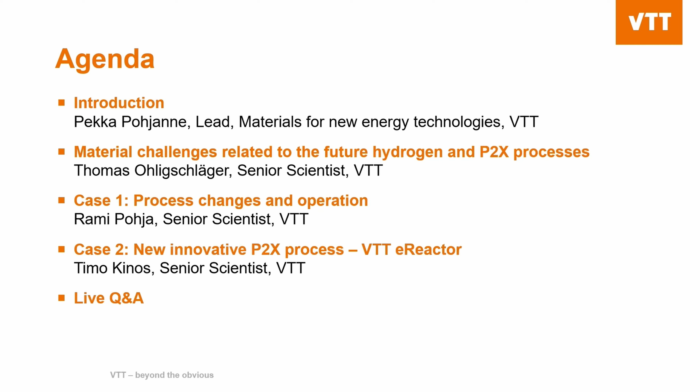When thinking about hydrogen, the topic is now booming a lot, and it's a quite huge, broad area, so cooperation is really needed in this context. Seldom can anyone do it all by themselves, so cooperation is the key.

Some basic figures from VTT, if you are not familiar with VTT before: VTT is one of the leading research organizations in Europe, and our current staff is around 2,200 people. Through science and technology, we are turning global challenges into sustainable solutions for companies and society in a responsible way.

If we talk about the hydrogen economy, there is no doubt that electrification and hydrogen are key drivers when talking about green energy, green transition. The main advantage of hydrogen is that it's versatile - a versatile energy carrier, but also a raw material for different kinds of products and chemicals.

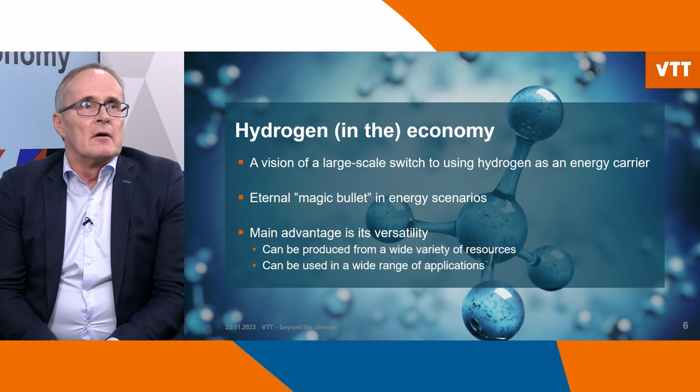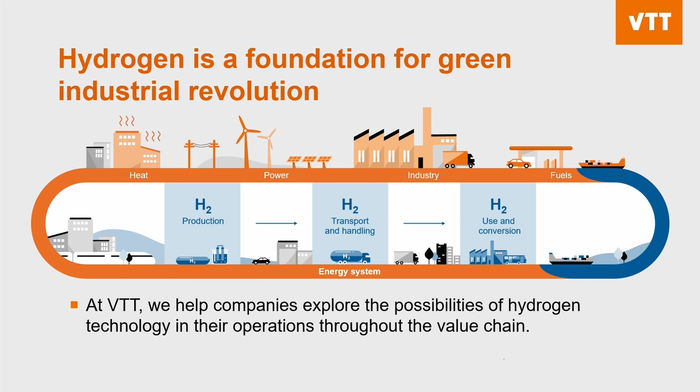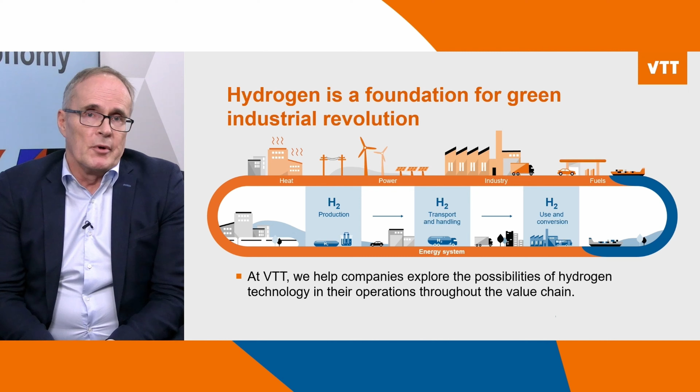At VTT, we are working throughout the hydrogen value chain, supporting companies and the economy to get good performance solutions. Starting with hydrogen production - different kinds of production, electrolyzers, gasification, and so on. Then talking about hydrogen transport and storage issues - pipelines, hydrogen underground - and not forgetting the use and conversion of hydrogen, for example as a fuel or as a base chemical to produce power-to-X components, e-fuels, together with carbon dioxide.

VTT has versatile and good facilities to examine hydrogen and produce new kinds of chemicals, and we will expand our capabilities in the future. We are building a new clean energy pilot platform at Bioruukki, which should be operational in 2025-26 - an innovative platform for hydrogen, electrification, and renewable fuels.

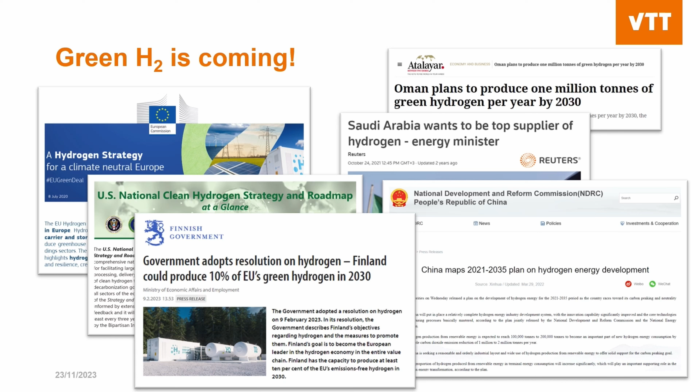We will have green hydrogen. This is coming, this has been decided worldwide. The European Commission, the European Union has a hydrogen strategy, the US has a hydrogen strategy, China too. Finland wants to produce 10% of the green hydrogen in Europe by 2030. Also countries that are at the moment producing fossil fuel are interested in hydrogen. So this is coming - and what will we do when we have so much green hydrogen?

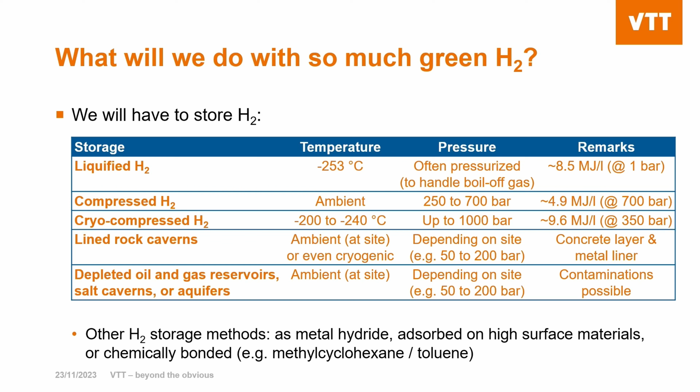First of all, we have to store it. We can do that as liquid hydrogen - here we have low temperatures, about minus 250 degrees Celsius or even lower, and the pressure is relatively low. It's also possible to store hydrogen only compressed, at ambient conditions. And also a combination, cold compressed hydrogen, where we have minus 200, minus 240 degrees Celsius and up to about 1,000 bars, which gives us the highest volumetric energy density.

For long-term storage, we can use lined rock caverns, which will probably be used more in Scandinavia. In Central Europe, where we have depleted oil and gas fields, it's possible to store hydrogen as natural gas is stored at the moment. The conditions here are also pressurized and at temperatures that exist at the site.

It's also possible to store hydrogen as metal hydrides, which is used only in special applications - for instance on submarines, this could be useful or is used. And it's also possible to adsorb hydrogen on high surface materials, or it can even be chemically bonded to chemicals so that the hydrogen is not stored as gas anymore.

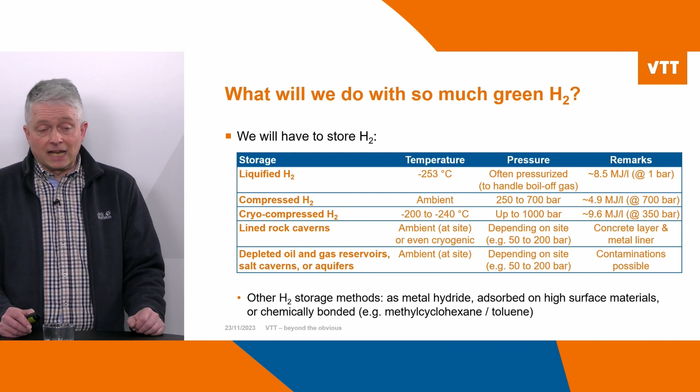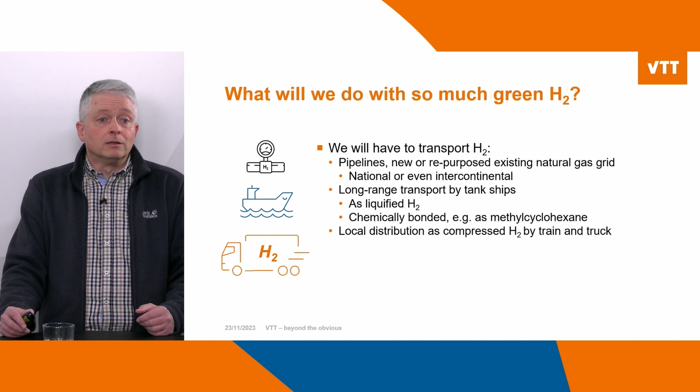When we have that hydrogen stored, we also want to transport it to the places where we use it. And we do that, as Pekka already mentioned, with pipelines. They can be new or they can be repurposed existing natural gas pipelines. There will be long-range transport, for instance, in tank ships, usually as liquefied hydrogen. Then it's also possible when hydrogen is chemically bonded, for instance, to methyl cyclohexane, which is then stripped to toluene.

And also there will be local distribution of hydrogen in trains and trucks. When we have that hydrogen distributed to the place where we want to use it, we can do quite a lot of things with it. There will be the possibility to use hydrogen as a fuel for a burner, replacing natural gas, for instance, or propane.

Then there is the possibility to use hydrogen in combustion engines, which may not be useful for cars, but perhaps that's possible. Maybe that's more with ships or even planes, if that would be possible. Then there are the fuel cells, which are producing electricity from hydrogen. And then there is the possibility to use hydrogen to produce base chemicals for the chemical industry, and also so-called e-fuels, fuels made artificially from hydrogen and a carbon source.

E-gasoline, e-diesel, e-kerosene, that is what's on the agenda, but also the base chemicals, ammonia, methane, which is natural gas, hydrocarbons, alcohols, organics, and so on. And it can also be used in metallurgical processes as a reductant. This is at the moment coming more into vogue for the production of iron instead of the reduction by coal to produce direct reduced iron.

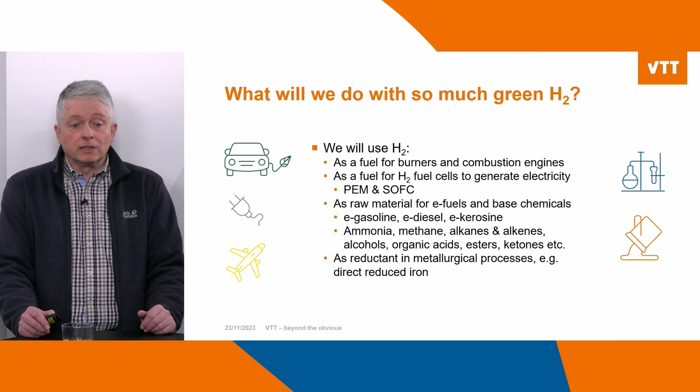When we're looking at these industrial processes where we will use green hydrogen, there are these processes, for instance, for ammonia, methane, and also these hydrocarbons and also methanol. That's possible to do at increased temperature with increased pressure, commonly using a catalyst. And the temperature range is usually about 150 to 450 degrees Celsius, and the pressure can be even several hundred bars if needed.

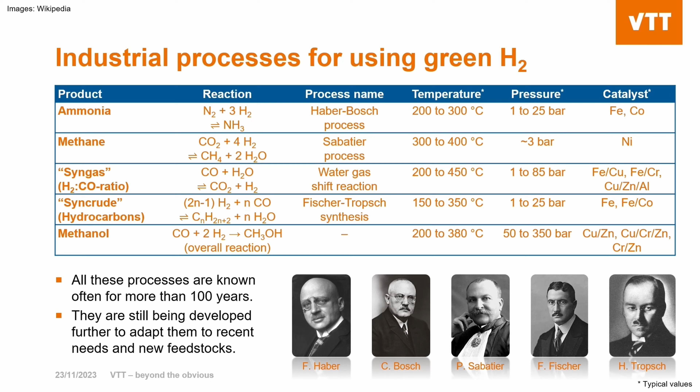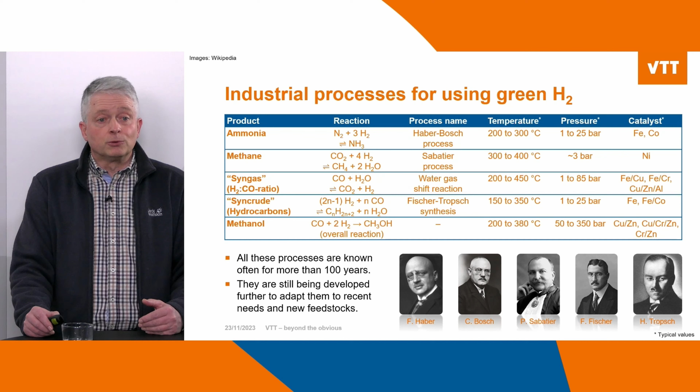As you can see, these processes have their own names, and they were named after their inventors. And if you look at the pictures here below, they are quite old. So these processes are quite old, about 100 years old. Some of them even, in the beginnings, a bit older. So there is some experience with these processes. They have been used over the times more or less. And still they are being developed further and adapted to the recent needs and also to new feedstocks.

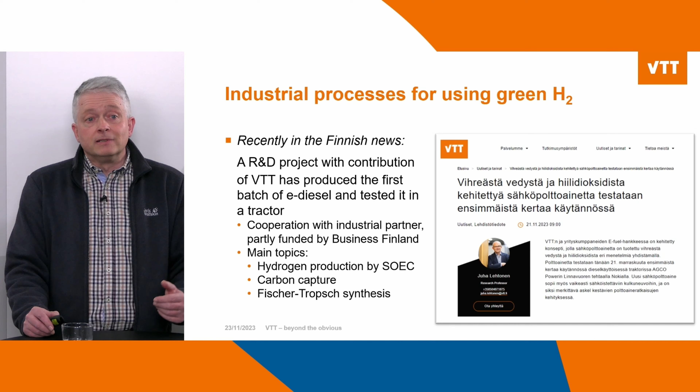For instance, it was yesterday in the news here in Finland that VTT, through a research project it has contributed to, has produced its first batch of e-diesel, and it was tested in a tractor. There we had a cooperation with several industrial partners, and it was funded by Business Finland here. So this project included several steps: hydrogen production in a high temperature electrochemical cell, carbon captured from a process environment, and then the Fischer-Tropsch synthesis to produce the hydrocarbon. So cooperation is very essential here.

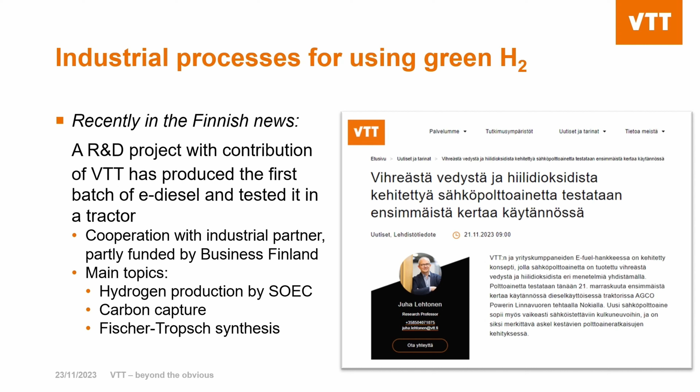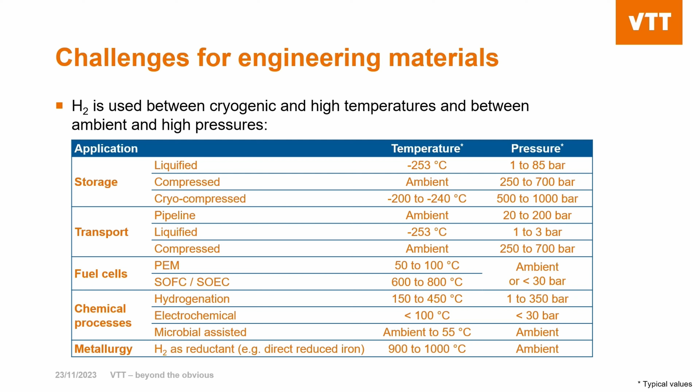To summarize here, where we can encounter hydrogen, we can say it takes place across a very broad range. You can find it from very low cryogenic temperature to very high temperatures, from minus 250 to plus 1,000 degrees. The pressure can be at 1 bar at ambient conditions, or even at high pressures of up to 1,000 bars. So it's a very broad range, and this is a challenge for engineering materials here.

And when we look at what hydrogen is doing with our engineering materials, for instance, with metals, we often observe that hydrogen is absorbed in metals as hydrogen atoms, and it is incorporated in the metal lattice on interstitial positions. This enables quite often a relatively fast diffusion by a hopping mechanism between these interstitial sites. And also the hydrogen can interact with crystal defects, with the dislocation structure in these metals, and quite often changes the mechanical properties of the material.

The influence of the crystal structure of the metal itself has an influence on how this takes place. Usually, face centered cubic metals, or metals with the face centered cubic crystal structure, are less affected than those with body centered cubic or hexagonal close packed structure. So the FCC structure is austenite, the BCC is in the iron system the ferrite, and the HCP would be martensite.

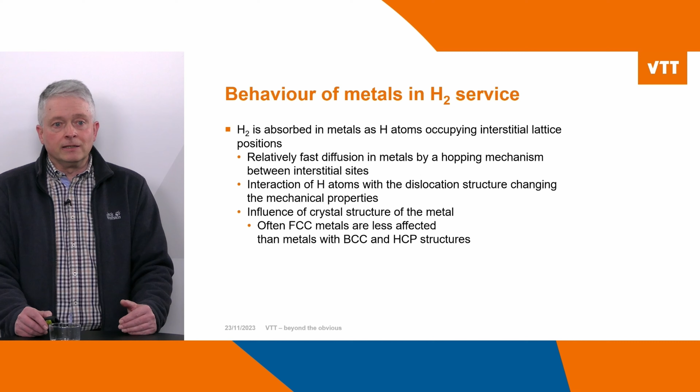This may cause problems. Hydrogen changes the mechanical properties, and it causes hydrogen embrittlement. This leads often to cracking because the strength of the material is decreased and the material loses ductility and impact toughness. The reason here, roughly summarized, is that the hydrogen interacts with the interstitials, interacts with the dislocation structure and its movement. So this is important, especially when metals are under load or are deformed.

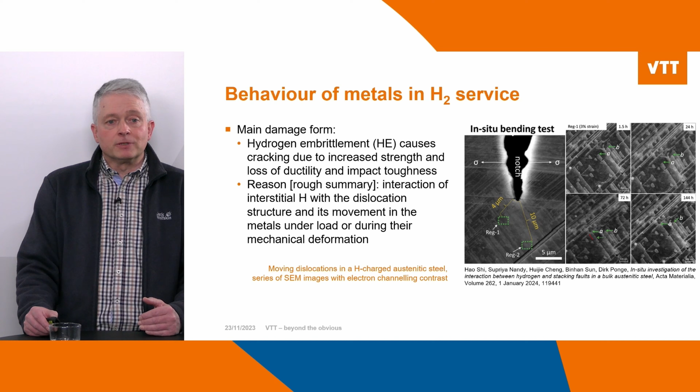On this microscopic picture here, you can see a series of electron microscope images with electron channeling contrast, where you can actually see dislocations moving. The picture here is after 72 hours; some dislocations have moved. This material was also under mechanical load, and this movement was caused by hydrogen. When the authors of this study did a similar experiment without hydrogen, they did not observe this. So this is a clear effect that hydrogen interacts with dislocations in metals.

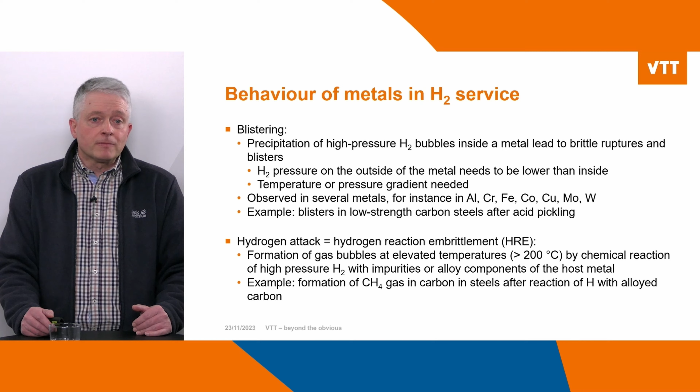What else can happen? It's possible that we observe blistering when metals are in contact with hydrogen. Especially high pressure hydrogen bubbles can form inside the metal and cause brittle ruptures and blisters. Usually the hydrogen pressure outside of the metal has to be lower than inside, so there needs to be a temperature or pressure gradient. Several metals are affected. A typical example would be blisters in low-strength carbon steels after acid pickling. That is something that sometimes is observed.

Another phenomenon is hydrogen attack, or hydrogen reaction embrittlement. That usually takes place at higher temperatures, and here the hydrogen reacts chemically with the carbon in the steel, for instance. It can also react with oxygen in copper, and then water would form. For instance, when we have iron carbide, methane forms.

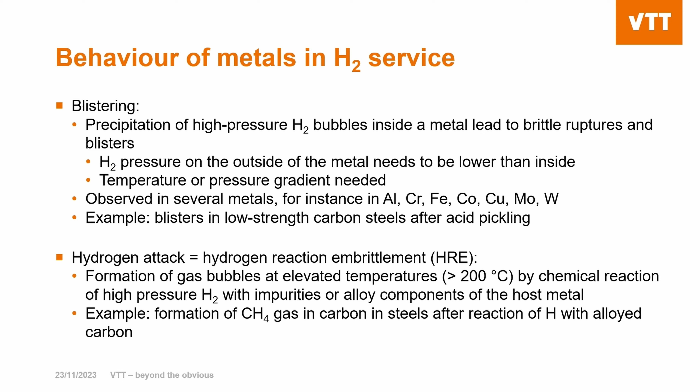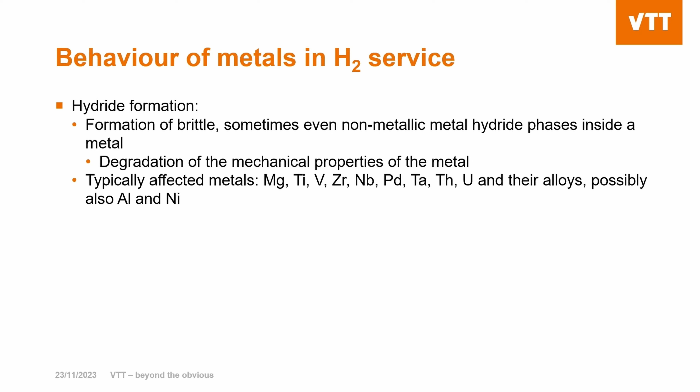Another failure possibility for metals with hydrogen is the formation of hydrides. Metal hydrides may form with hydrogen, and then the material is usually brittle. They may even be non-metallic, and cause a degradation of the mechanical properties of the material. Typical examples are, for instance, magnesium, palladium, and also it's discussed with aluminium and nickel.

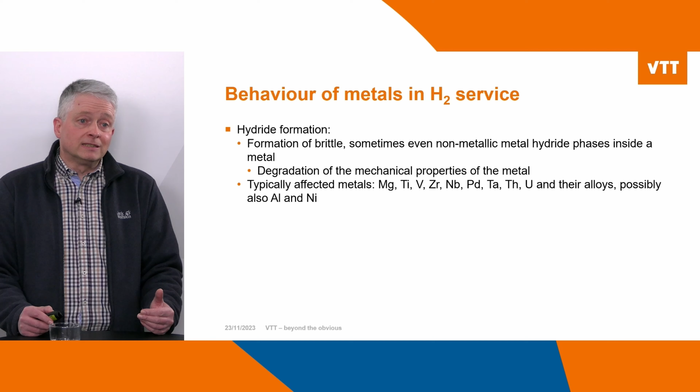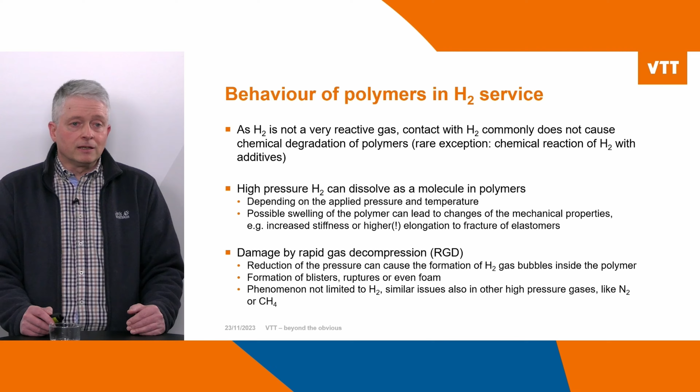When you look at polymers, the situation is a little bit different. Hydrogen is interacting differently with polymers. It is actually not a very reactive gas and does not cause direct chemical degradation of a polymer. It may be that it sometimes reacts with certain additives, but this is a really rare case.

It's usually dissolved in the polymer as hydrogen molecules, and especially under high pressure this can lead to swelling of the polymer, which then changes its mechanical properties. For instance, the stiffness of the polymer can increase, or the elongation of elastomers will become even higher when there's hydrogen pressure from the outside.

Another situation is when high pressure hydrogen was in contact with a polymer and had been dissolved in it, and then the pressure is reduced. The hydrogen can form gas bubbles in the polymer while it's diffusing out. This can cause blisters, rupture of the polymer, or even foam can form. This is not a phenomenon only caused by hydrogen - it also takes place, for instance, in high pressure nitrogen or high pressure methane.

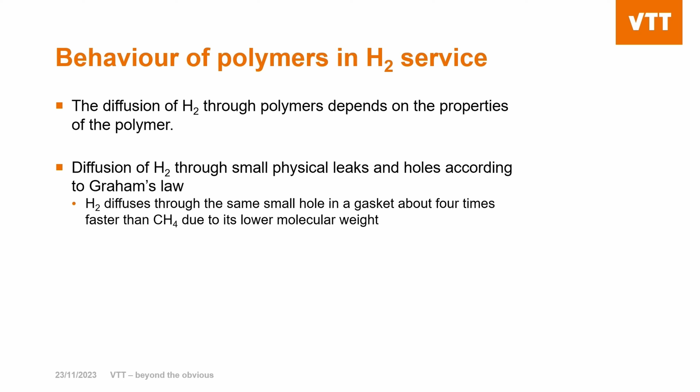The diffusion generally of hydrogen through polymers depends mainly on the properties of the polymer, not so much on the size of the atom or molecule, which is quite small. On the other hand, when there is a very small physical leak in a seal, Graham's diffusion law comes into action, which says that the diffusion of gas through a very small hole depends on the molecular mass of the gas. As hydrogen is a very light molecule, the diffusion is quite fast - for instance, it's four times faster than that of methane.

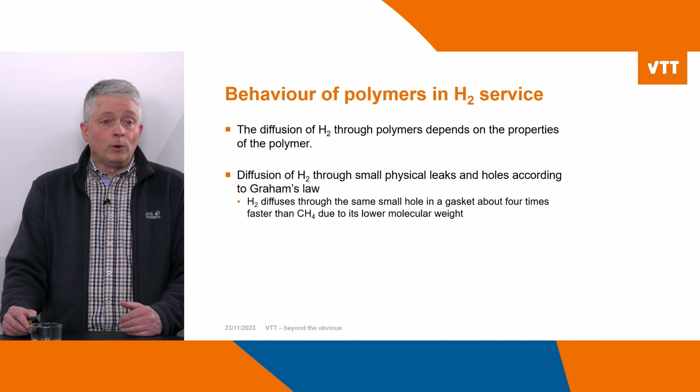That needs to be considered when you construct or plan seals or gaskets.

So to summarize my presentation shortly: to reduce the consumption of fossil fuels and fossil raw materials, hydrogen will be used more often in the future than today. This means the processes that use hydrogen will have higher volumes, there will be more installations, more different applications, and also new users. When suitable materials are used, it is possible that hydrogen can be used safely in these applications, because, as you probably already know, hydrogen is an explosive gas and poses some safety risks.

With these applications, there are really many different conditions where we can encounter hydrogen, as I said before - from low temperatures to very high temperatures, from ambient pressure to very high pressures. We know quite a lot of these processes, many of which we have used hydrogen for already a quite long time. There is already quite a lot of experience with many materials, and still there is some data missing on a lot of materials. Standardization, which is also very important for constructing safe process equipment, is at the moment lagging behind, but there are many efforts being done.

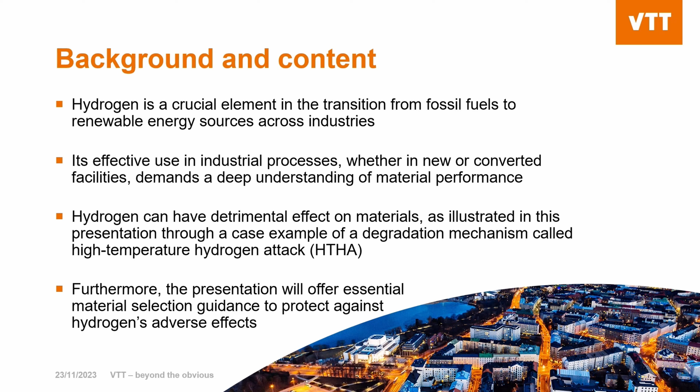Hydrogen can have detrimental effects on materials, as will be illustrated in this presentation through an industrial case example of a degradation mechanism called high-temperature hydrogen attack. This presentation also aims to provide some material selection guidance to protect against hydrogen's adverse effects in materials.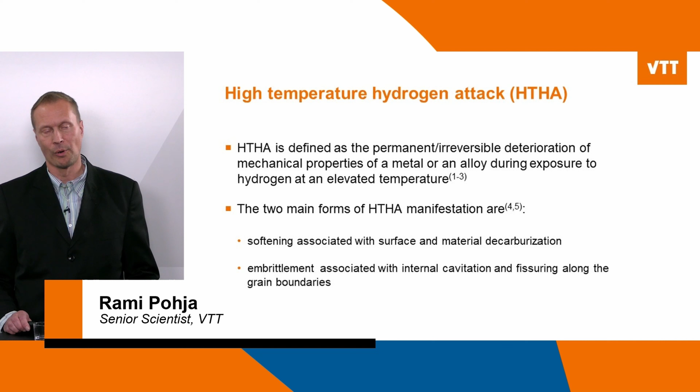There are two main forms of high-temperature hydrogen attack manifestations: first, softening, which is associated with surface and material decarburization; and second, embrittlement, which is associated with internal cavitation and fissuring along the grain boundaries due to methane bubbles.

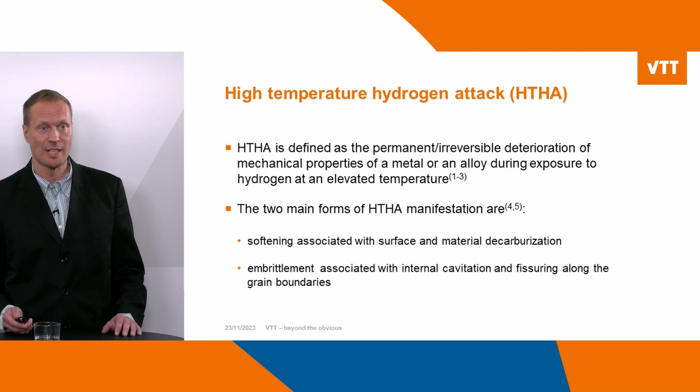The high-temperature hydrogen attack mechanism goes as follows. First, the chemical reaction between hydrogen and carbon in solution in steel, or carbides in the microstructure, forms methane. This consumption of carbon in the matrix promotes dissolution of these carbides to keep the atomic carbon in solution in balance. These methane molecules are too large to diffuse out of the steel, causing significant pressure buildup that results in the formation of cavities or voids, also called methane bubbles, at the grain boundaries or other areas of high interfacial energy, such as inclusion surfaces.

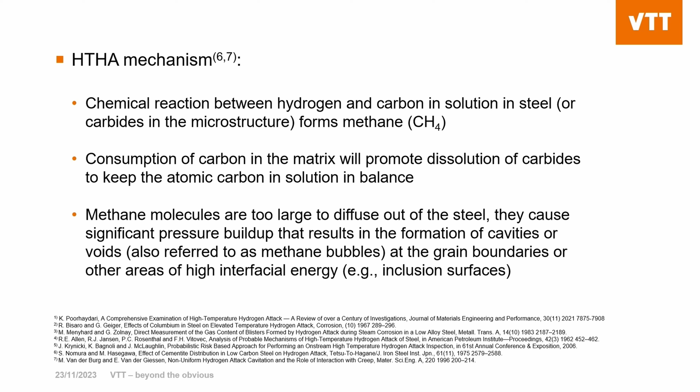Next I'm going to present an industrial case example where an older plant, which had been converted to hydrogen service, suffered from severe high temperature hydrogen attack. In this example, a circulating gas piping failure occurred in a process application involving hydrogen.

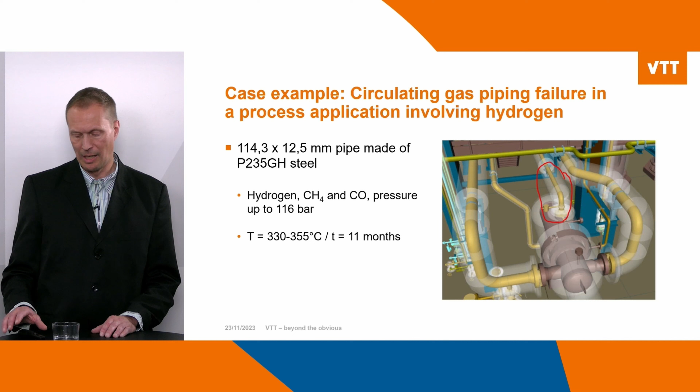The pipe that failed in this case was a carbon steel P235GH steel with an outer diameter of 114.3 millimeters and a wall thickness of 12.5 millimeters. The process included hydrogen, methane and carbon monoxide, with process pressure up to 116 bars and temperature from 330 to 355 degrees Celsius. Time elapsed was 11 months.

The pipe failure occurred after 11 months of use, and the pipe had broken into several pieces, so the failure was rather extreme. A first look at the samples revealed a deposit layer on both the inner and outer surfaces, but no substantial corrosion, such as significant wall thinning, had occurred.

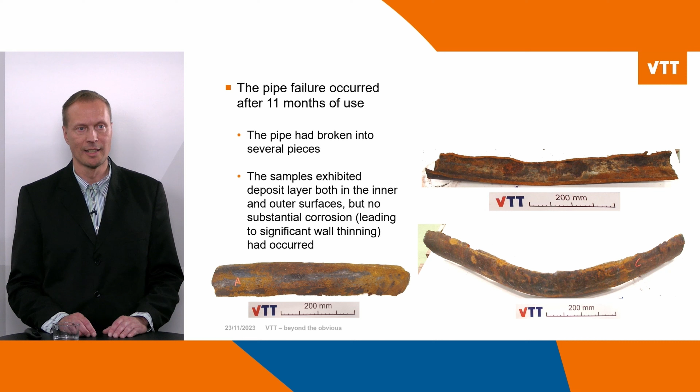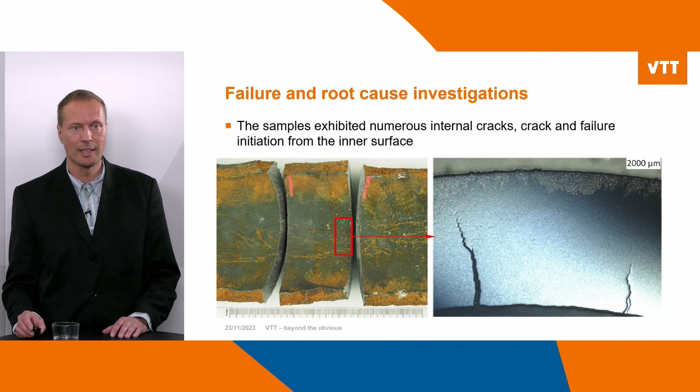A closer visual look revealed numerous internal cracks, and these cracks and the failure initiated from the inner surface of the pipe, going towards the outer surface. In the right-hand side figure, we can see two quite major cracks initiating from the inner surface and going towards the outer surface of the pipe.

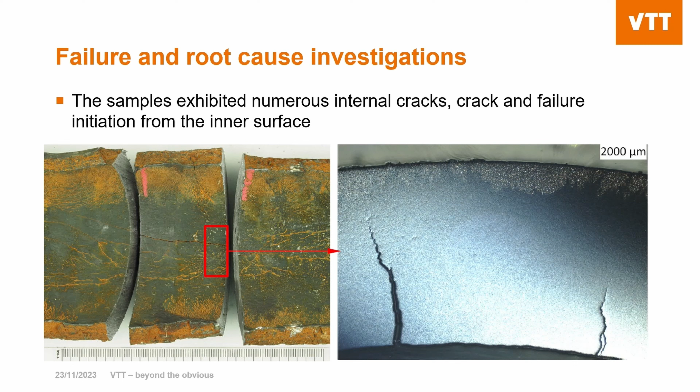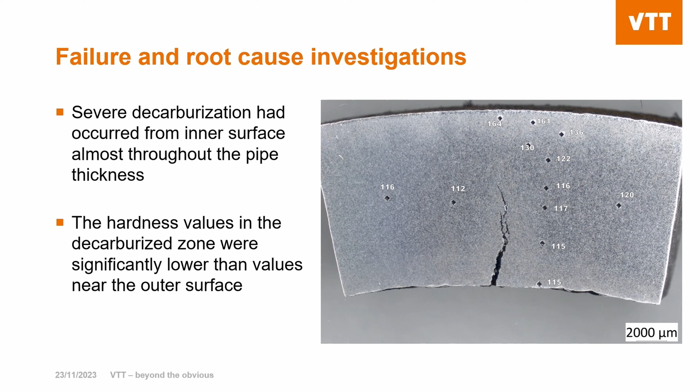Based on these investigations made at VTT and also based on the background data from the customer, it was evident that severe high-temperature hydrogen attack had occurred in this carbon steel pipe, which was in an older plant that had been converted into hydrogen service.

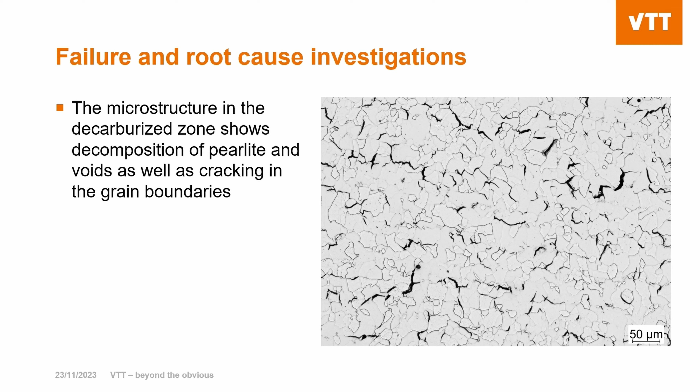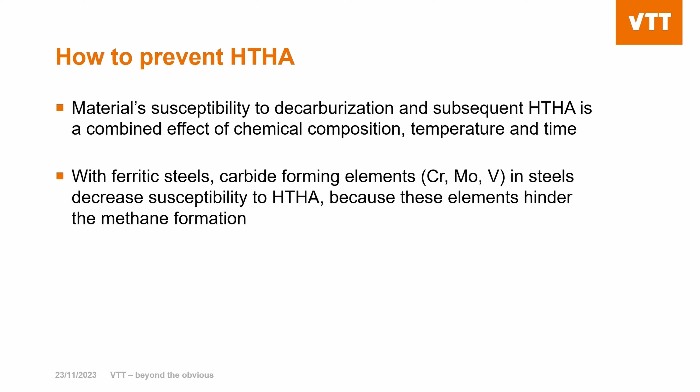Now, how to prevent this high-temperature hydrogen attack from happening? Materials' susceptibility to decarburization and subsequent high-temperature hydrogen attack is a combined effect of materials' chemical composition, process temperature, and time. With ferritic steels, these carbide-forming elements such as chromium, molybdenum, and vanadium decrease the susceptibility to high-temperature hydrogen attack because these elements hinder the methane formation.

Austenitic stainless steels are better. They exhibit a more stable face-centered cubic structure against high-temperature hydrogen attack, and their alloying elements contribute to the formation of stable carbides and nitrides, which can help mitigate the effects of hydrogen attack.

But in industrial applications, things tend to be far more complicated than relying on these kinds of handbook instructions. Therefore, VTT conducts comprehensive research for materials in hydrogen service, and we can provide support for our customers in their unique cases and challenges.

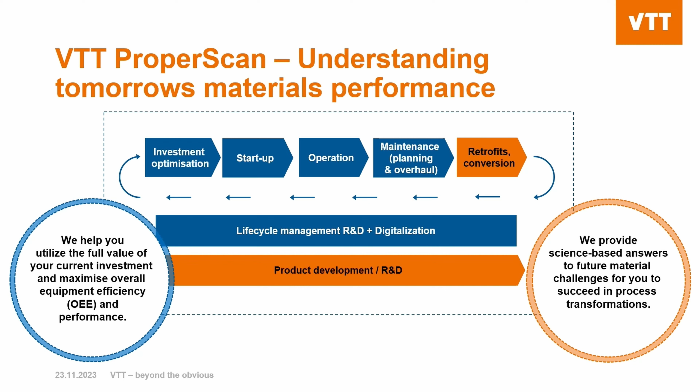VTT has a wide range of materials experts. We have solid knowledge on materials technology and materials performance, based on high-end scientific research that we carry out at VTT related to these issues. So please do not hesitate to contact us with your interesting material challenges. That is all, thank you.

Power-to-X technologies are words which can be seen and heard today quite often, because they enable the production of carbon-neutral fuels and chemicals, for example by utilizing green hydrogen and captured carbon dioxide. So we need renewable energy from solar or wind power, for example, and the hydrogen is produced in electrolyzers instead of cracking natural gas, which is being done even today.

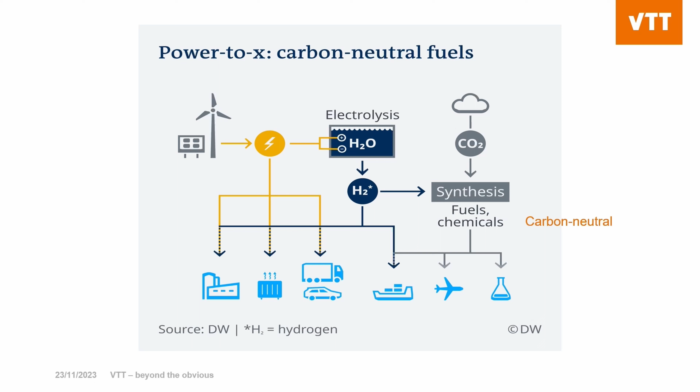And then producing this synthesis gas and using that further, for example in the Fischer-Tropsch synthesis, it's possible to make hydrocarbon products like e-gasoline, e-diesel, and that kind of thing. And of course, it's also possible to use electricity directly in vehicles and also in industry and for heating, without this synthesis.

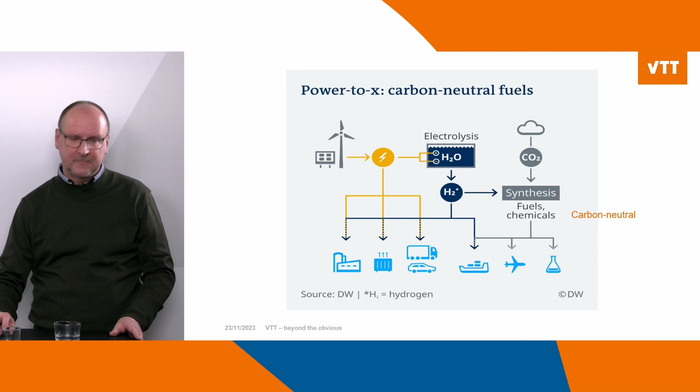So why does this transition towards e-fuels and e-chemicals actually happen? Currently the main drivers, according to our interviews, are certificates, regulations and legislation given by countries and the EU, for example. There's also customer demand, because customers understand that we are responsible for our planet, and want to make it a safer place to live. Political decisions are there in the background too, and subsidies play an important role. But then the price is, I think, the most important thing.

So this transition doesn't happen in one night; it will take decades in practice. And according to these interviews, Fischer-Tropsch and electrolyzer technologies will be the most preferred e-fuel production methods in the future. But one important thing is that these fuels should be matched with existing infrastructures and pathways that can replace fossils directly.

Different countries have dealt with different ways to speed up this process. So the EU uses a little bit more stick, and the US, for example, more of a carrot type approach to drive this transition. But of course, there are also safety issues in the placement and storage of these new fuels.

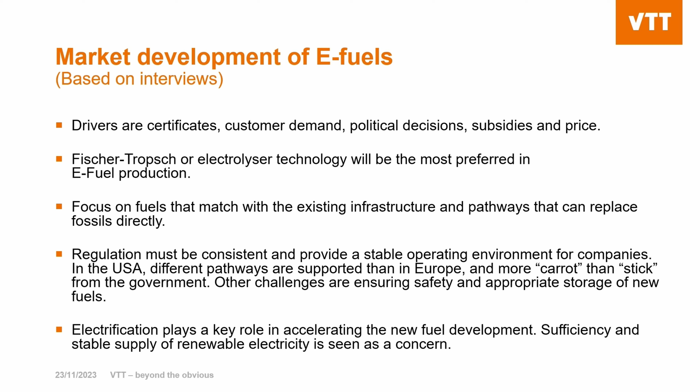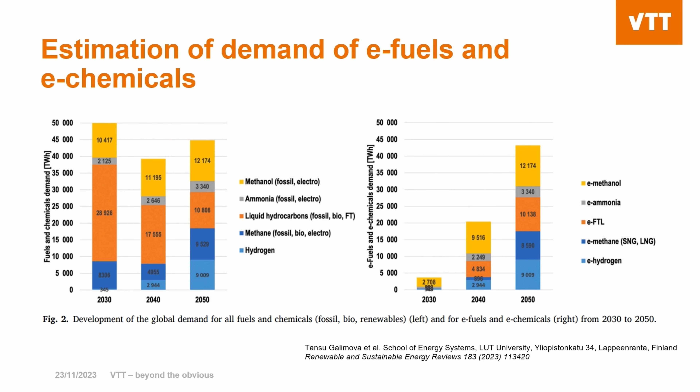So this is one estimation about how fast this transition will happen towards e-fuels and e-chemicals, given by the Lappeenranta-Lahti University. As we can see, it will take several decades before we get a bigger amount of e-fuels and e-chemicals. So these normal fossil fuels will stay in the market quite a long time still, because this will also be a price issue in many cases. These new fuels are more expensive than the conventional ones.

So about this e-reactor itself. Shortly, it's an electrified, resistively heated element in the reactor. Normally these reactors have been heated externally using or burning fossil fuels. But now we are heating this critical component directly with electricity, with clean, green electricity, so we don't cause any carbon emissions in this process. And this can now be done for the reactions, for example, for Power-to-X and carbon capture utilization.

These practical syntheses are, for example, reverse water gas shift reactions. It can also be used for ammonia decomposition and dry and steam reforming in practice. This element can be heated and coated with a catalyst, because a catalyst is needed as well. It is a porous element with a radial flow, and the catalyst is then incorporated into the tube matrix or deposited on this porous material.

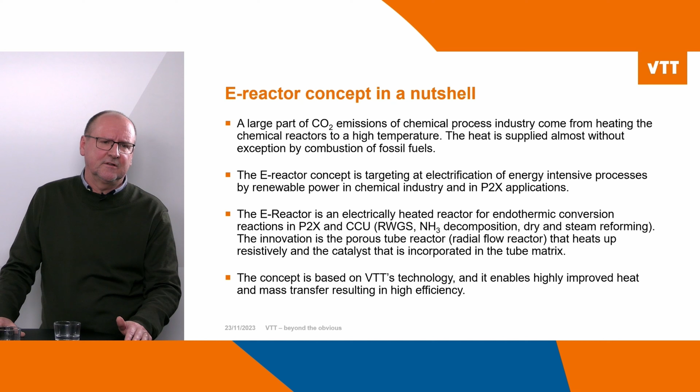So the application areas could be, for example, these three: syngas production via reverse water gas shift technology, where the syngas is then used further in Fischer-Tropsch to make e-fuels, for example. Also, ammonia decomposition is one application, where ammonia is a kind of storage for this green hydrogen. And then we can also have dry and steam reforming to produce hydrogen.

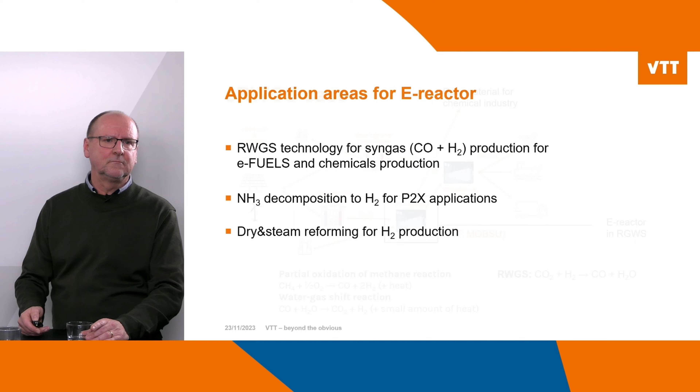This picture is a little bit not so clear, but it actually tells you how this process goes. So we have clean, renewable energy, then we produce hydrogen in electrolyzers, and we have also captured carbon dioxide. Then using, for example, RWGS synthesis, we get that synthesis gas, which can be further used in Fischer-Tropsch and upgraded to e-fuels.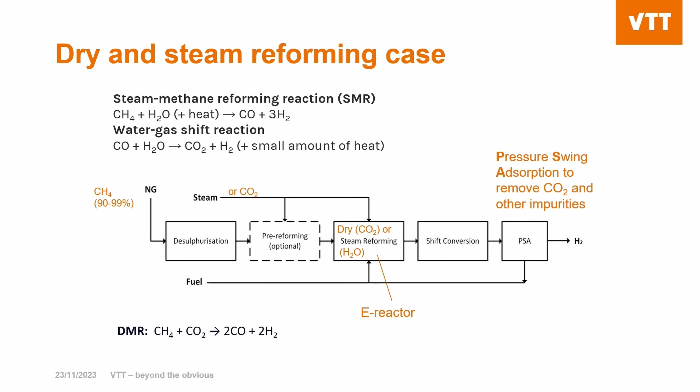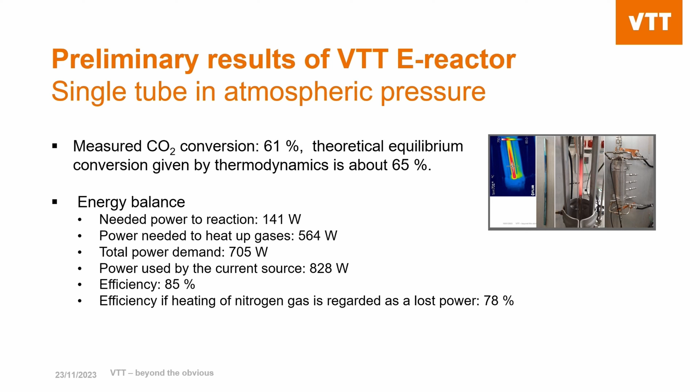So we started testing a couple of years ago, and these are the very first test results using a very simple reactor type, as you can see in the picture. We could get quite high carbon dioxide conversion, the measured value was 61% when the theoretical value at this temperature and pressure would be 65%, so it's quite a high value what we actually achieved. The efficiency was about 85% regarding power usage, a little bit lower if we take into account the heating up of this nitrogen carrier gas. But it looks very promising, and now we are currently making a slightly bigger reactor and using higher pressures to get better mass transfer values.

So if we look at the benefits of this reactor, we get rid of combusting these fossil fuels. We are now directly heating up the catalytic element with electricity, so there won't be any carbon dioxide emissions in this type of reactor.

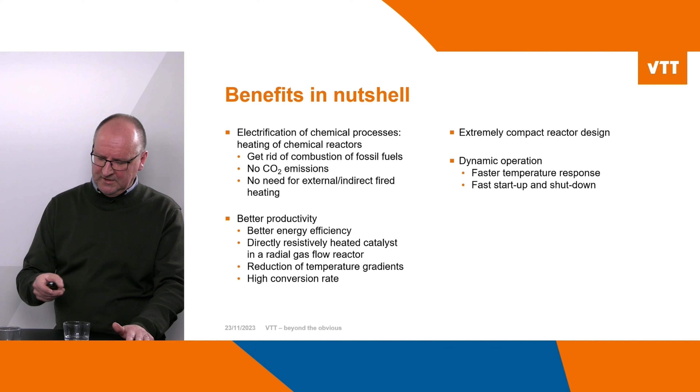Its size is very compact because of this heating type, and the dynamic operation is quite flexible and fast - faster temperature response and faster startup and shutdown. Efficient productivity. And of course the catalyst should be selected correctly so that the reactions take place effectively, giving very promising results.

If you think about capex and opex values - for example, in case of capex, comparing our E-reactor with the traditional externally heated RWGS reactor, we get 30% lower capex due to higher gas recycling rate and thus smaller electrolyzer capacity required. And comparing E-reactor capex to co-SOEC, the solid oxide high temperature electrolyzer, our capex is estimated to be 45% lower based on today's SOEC investment cost.

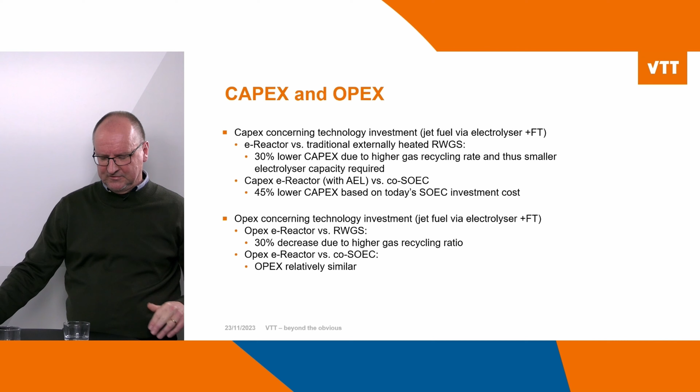And then about operating expenses concerning technology investment - jet fuel, for example, produced by this electrolyzer plus Fischer-Tropsch reactions. OPEX of this E-reactor is about 30% smaller due to higher gas recycling rate. And OPEX of E-reactor versus co-SOEC are about the similar level, so no big differences there.

Summarizing the material technology side very shortly: we have the catalyzed heated porous element, which can be manufactured, for example, using powder metallurgical methods. This catalyst selection is very important so that reactions happen as they should.

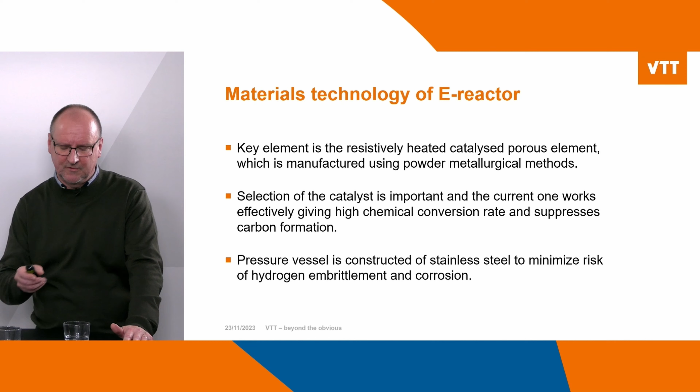What we have found in our case is that this reactor type suppresses the carbon formation on the surface of the reactor - a very positive thing. But normally this kind of vessel, this pressure vessel, our current reactor type, is constructed from stainless steel to minimize the risk of hydrogen embrittlement and corrosion. So nothing special here.

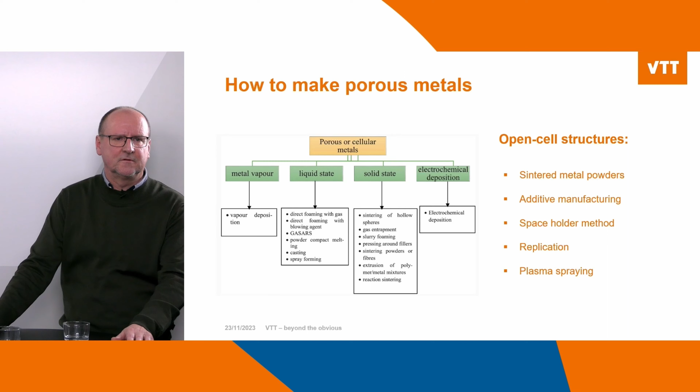This figure shows that there's plenty of different technologies to make porous materials, but in our case we need open cell structures, and we have used some of those technologies, for example, to make our element for the reactor.

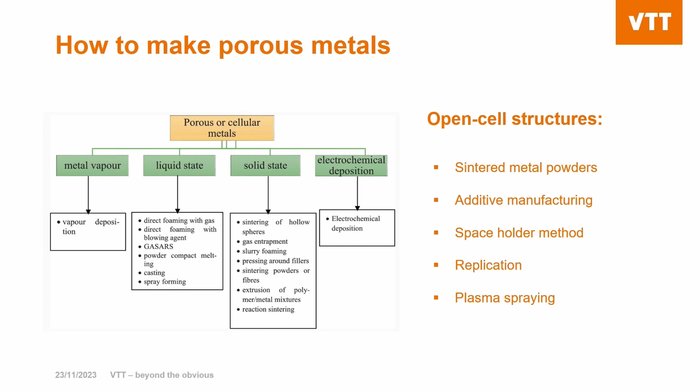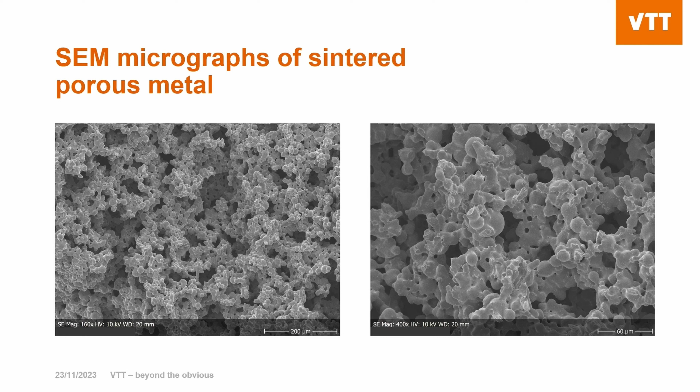These are scanning electron microscope images of those porous materials we have manufactured for our reactor, and you can see that the actual surface area is in practice quite huge because of this porosity. And it's still big enough so that gas flow passes through these walls from in to outside.

And we solve also technical challenges in relation to hydrogen production, storage, and utilization, and for example for the material technologies, so that we select the right materials for the right place when working with hydrogen. Thank you, that's all from my side.

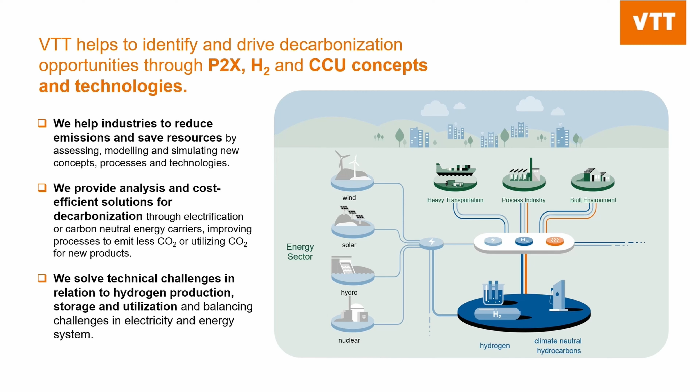So thank you, Timo. These three presentations showed good examples that hydrogen is a promising solution, one way to tackle these green energy transition challenges. But it has also some questions to be answered and some technical issues, as we had during the last presentation. But those are possible to tackle.